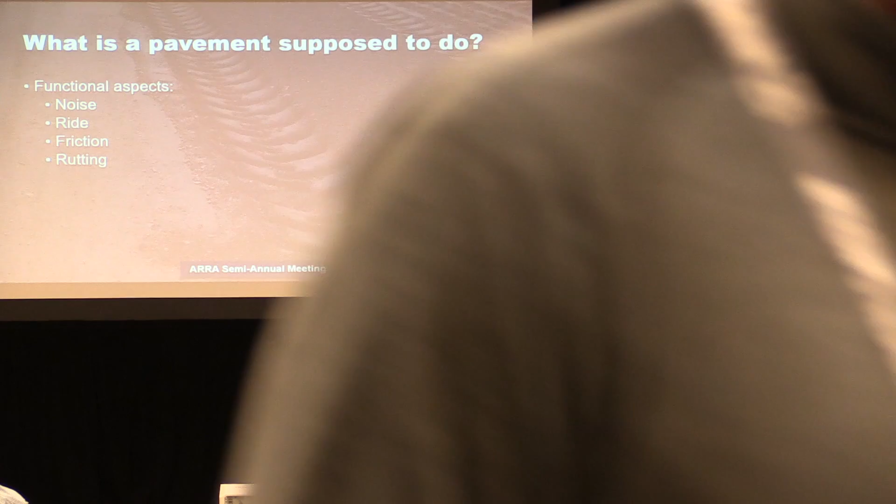It's got to be smooth. It's got to have good friction. It shouldn't be noisy. It shouldn't be rutted. And those are very important things. But in a lot of cases, rutting being kind of a hybrid, you can have a rough pavement that's structurally very sound. It may have terrible functional aspects, but great structural aspects, or vice versa.

You can take a road that's really in poor shape and do microsurfacing on it, and a week later, when the pavement management folks come out and rate it, it's going to look good, but is it really going to hold up? So what I want to talk about is more of the structural aspect of things.

In the early days of pavement design, when the whole field was being invented roughly 100 years ago, the original goal was to get the farmers out of the mud. The concern there was initially to protect the subgrade from permanent deformation. You don't want whatever's underneath the pavement moving around on you. You want to get it to where it stays stable. In the early days, that was really where pavement design mostly went.

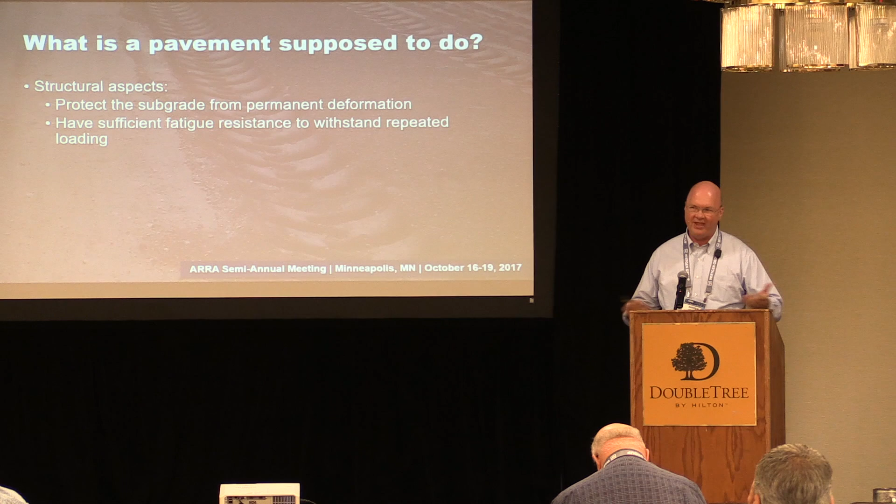But as loads and traffic numbers started to increase, certainly by the 50s, for more busy roads, fatigue resistance comes into the equation. What you have to imagine is like taking a coat hanger and flexing it enough times, eventually it'll break. It's the same thing with pavement, certainly bound pavement layers. You flex them enough times, they'll start to fail, even if they are, in theory, protecting the subgrade.

So how does a pavement do this? There's sort of two ways about going about it, and I'm not saying that one way is better than the other. They both have their pluses and minuses. But on one end of the equation, you're looking at flexible pavements.

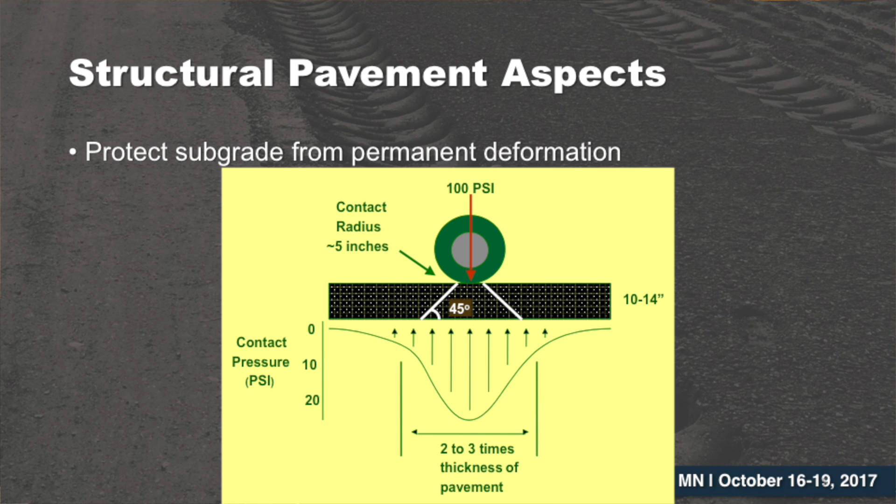And really, asphalt is sort of flexible in the sense that the coarse aggregate skeleton is what supports the load. You put a load on top, and what's underneath it is more rocks, and those rocks hold it up. And then the next set of rocks holds that up, and you keep doing that until eventually you spread the load out enough that whatever's underneath isn't getting damaged. If you have a softer material, you just stack more rocks on there, you get a bigger load, you stack more rocks on there.

And really the fine aggregate and the liquid is as much there to hold that skeleton in place as it is to provide strength. Now that's not entirely true, but just like if you take a physics class and they talk about frictionless surfaces and massless springs and things like that, there's no such thing as pure, but in this case, that's kind of how it works.

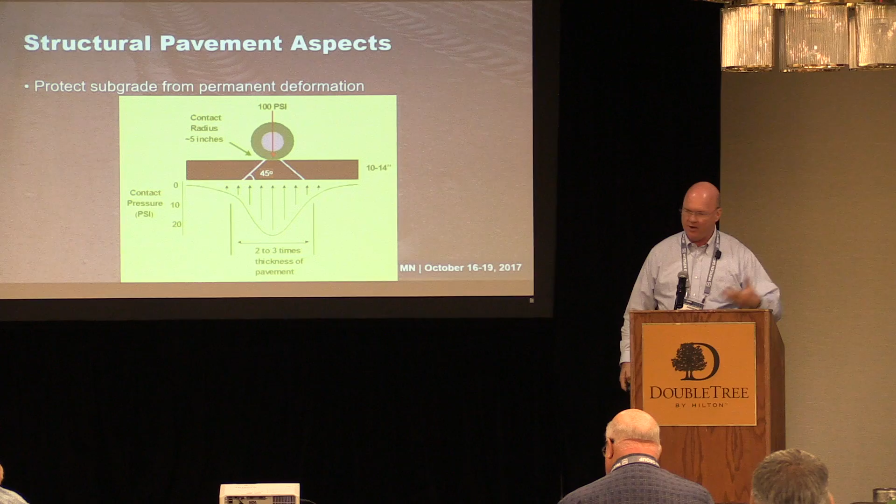So typically, if you have your load on top, what you end up with is 100 psi contact pressure tends to be reduced to about 20, 25 psi, and roughly a 30-inch surface area underneath. So if you have a relatively stiff subgrade, or you can put granular material underneath, that's great.

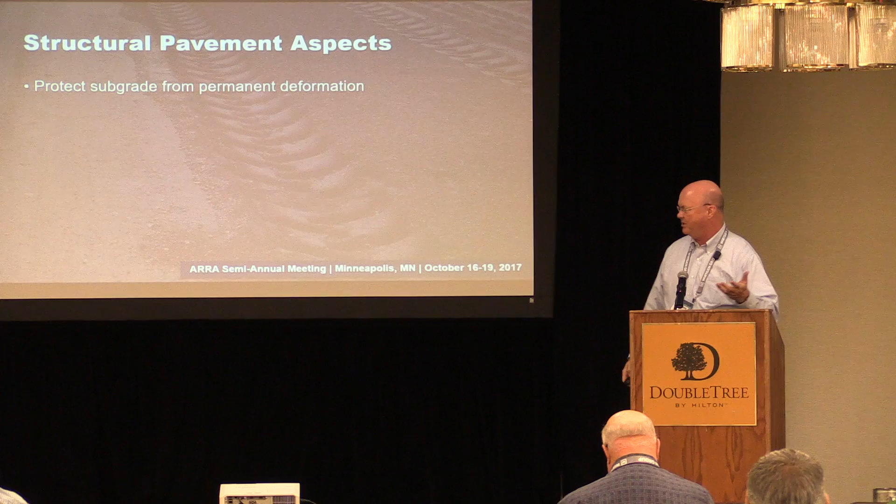When we talk about chemically treated base materials, instead of having that aggregate skeleton holding things up, what you have is a resistance to bending. In a rigid or semi-rigid base, that resistance to bending is what's holding up the load, and you have a lower pressure underneath. But obviously all the forces have to add up, so in the end you end up with a much larger area of influence for your load.

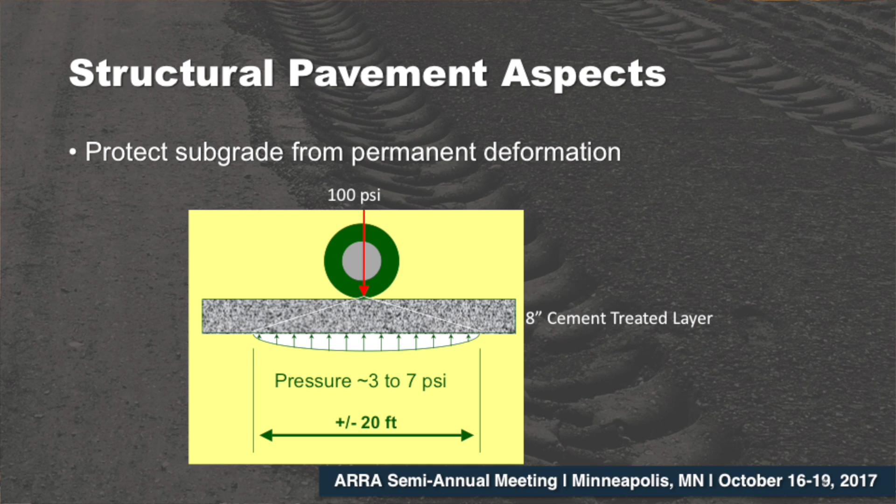This is both a bug and a feature in these sort of pavements. It's a feature because you're putting less pressure on what's underneath. It's a bug because if you have a problem in that pavement, 10 feet away things may start going wrong. If you imagine this wheel rolling along and getting to the end, all that load is kind of going to pool up right there.

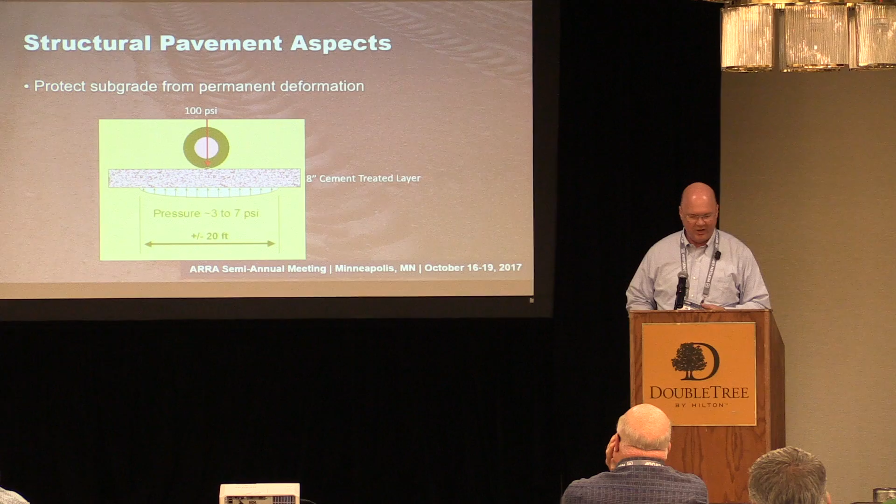So load transfer efficiency at discontinuities in this sort of base becomes very important. However, for most pavements in general, when you have a load on top of your pavement, it's typically in compression right under the load, and in tension at the bottom of the layer. Then out at a distance on top, it's in tension, and at a distance, it's in compression at a much lower magnitude.

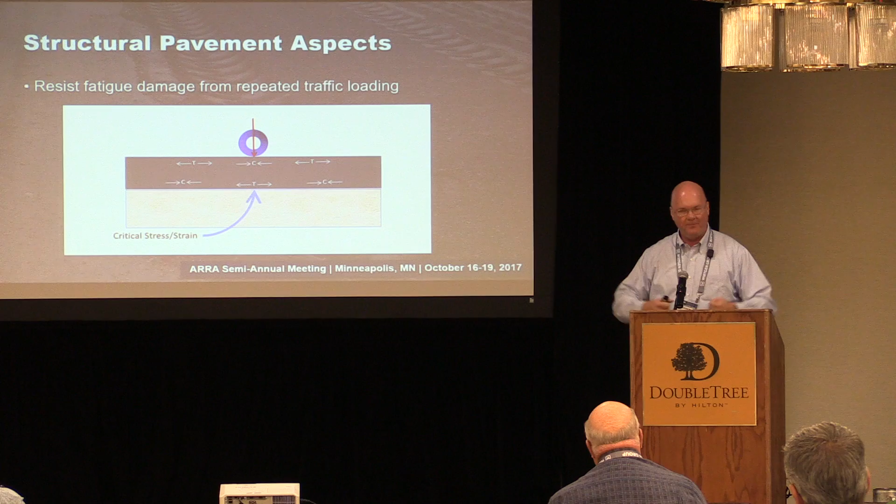If you imagine this wheel rolling down the road, whether it's a flexible asphalt or a stiff cement-treated layer, that layer is constantly undergoing a kneading effect because suddenly it goes into compression, then it's into tension, then back into compression again. It's kind of a back and forth motion, and that's where you have to worry about how things work.

So these days, for higher type roads, for most pavements with bound materials, fatigue damage is the controlling factor. I'm sure you can find exceptions, but in my experience fatigue damage is the controlling factor. This may seem obvious, but the larger the stress or strain at your critical point, the fewer load repetitions you get to failure. So ideally you either want fewer stresses and strains on the pavement, or you want to reduce them through your pavement design.

So the relationship between material response and damage is what they call a transfer function.

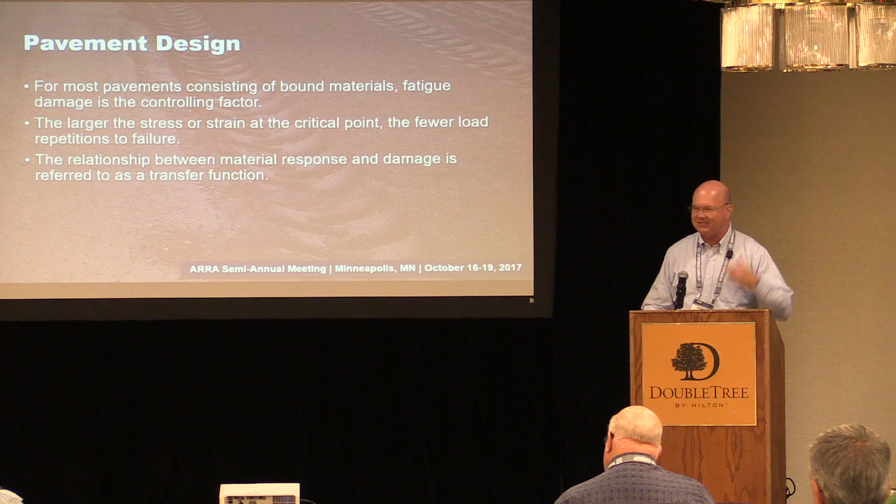These are complicated things, but still, from an intuitive thought experiment perspective, you can still kind of work on this.

You have two endpoints in any pavement design. At one extreme, you can have a pavement that'll fail the first time you use it. You see this more in airfield type pavement where you've got really heavy landing gear loads that can punch through a pavement from the get-go. I personally have never designed a pavement that failed in one load repetition - my own personal record is 8 hours. That was not a good day, especially because it happened on Interstate 85 over Memorial Day weekend, so it was a temporary pavement. It was supposed to last 3 days, not 8 hours, but anyway.

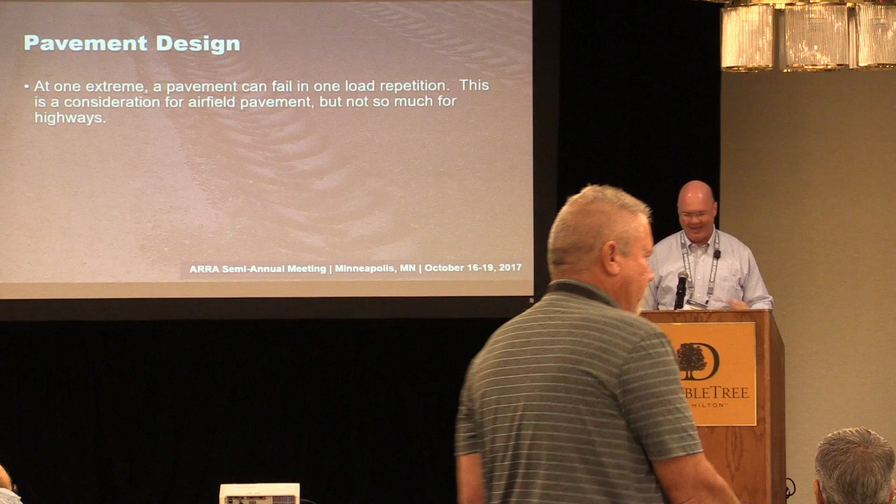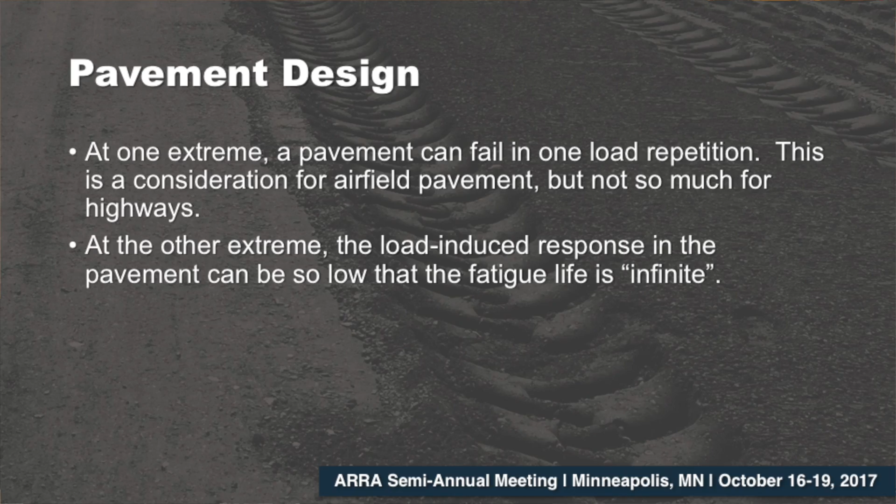This typically is not a problem for most highway type pavements, but at the other end of the spectrum - and Dr. Powell from NCAT talked about this a little the other day - you can have the load-induced response in that pavement be so low that you more or less consider it to have an infinite fatigue life.

Now, does that mean the pavement lasts forever? No, there's still environmental factors, still natural variation in the field from construction, the traffic may not be what you think, whatever. But from a pure perspective, if you stress your pavement so little, it should not fail from a fatigue relationship. And ideally, if you can get to this point at a reasonable cost, that would be nice to have.

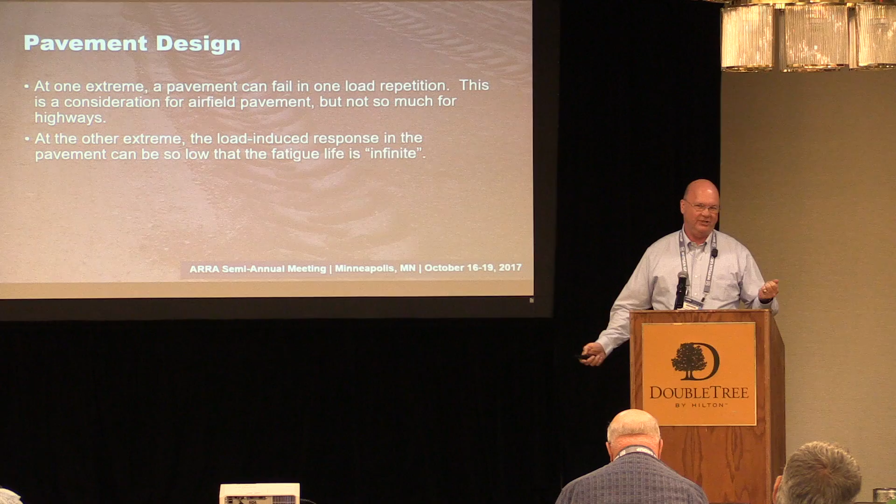I had a civil engineering professor many years ago who once said that a civil engineer is a person who can do for a nickel what any damn idiot could do for a dollar. So you can always design a pavement to be 28 inches thick and have 5 layers, and it might work, but you really don't need that for a residential neighborhood. So the key is to try to get there cheaply.

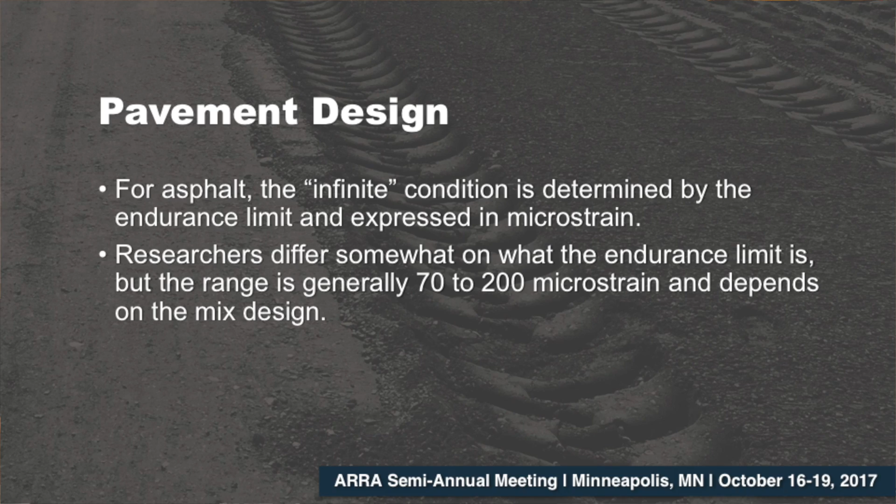So in asphalt, and again, Buzz spoke about this yesterday, the infinite condition is determined by what's called the endurance limit, expressed in microstrains - sort of how much you're stretching the asphalt. There's typically some variance; you can always find researchers with different numbers, but typically 70 to 200 microstrain is considered a perpetual condition, depending on the mix design and other conditions.

For cement-treated bases, or really chemically stabilized bases, the fatigue life is expressed as the ratio of the horizontal tensile stress to the modulus of rupture. Modulus of rupture is pretty much where you're looking at the tensile characteristics of a cement-treated material.

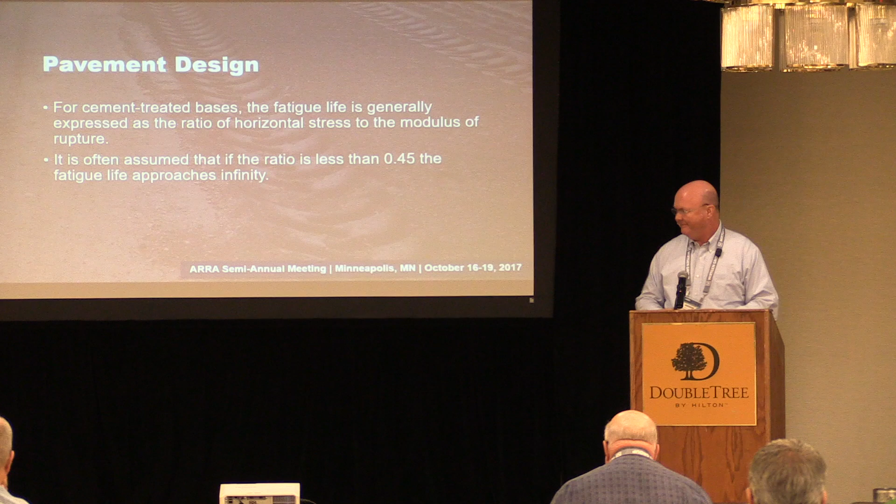Concrete, use the thought experiment here - obviously concrete likes compression much more than it likes tension. So tension, even in a cement-treated base, is an issue. You want to keep that tension in that material at a relatively low proportion of what it takes to bust it. A lot of models assume that if you keep it below 45% of the modulus of rupture, you shouldn't have failure in fatigue, and different models pick a different number, but it's somewhere in there.

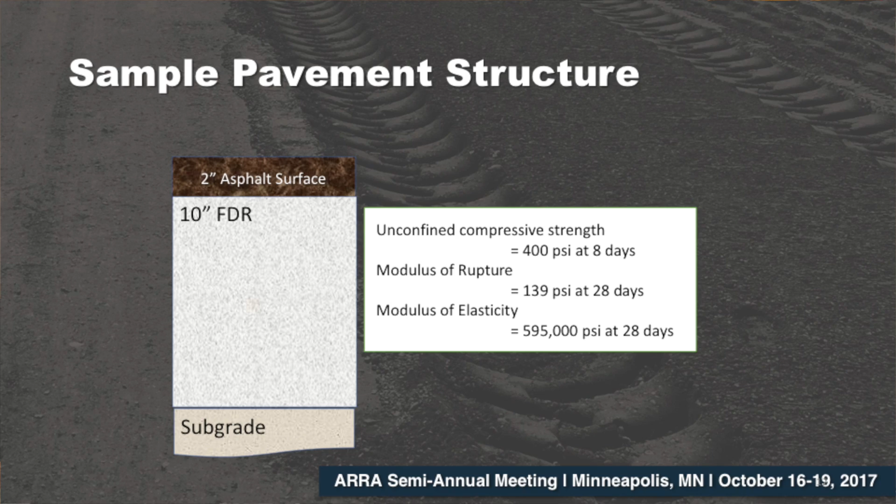So here's a typical pavement. South Carolina predominantly uses cement-treated FDR. We have a long history in South Carolina of cement-treated bases. South Carolina did the first scientifically designed cement-treated base in 1935. It's still in service - they did 3 or 4 projects, and most of them that we can still find are out there. So that's what we do a lot of, this is sort of what this example is, but you can do it with other materials.

So here we're assuming our unconfined compressive strength is 400 psi, and that works out to be a modulus of rupture of 139 psi - that's another one of those get-a-million-dollars type things. There are a number of different correlations between modulus of rupture and compressive strength, so you may have a different one. I'm not up here to necessarily push one of those models, this is just an example.

So what is it David Letterman used to say? This is a demonstration, not a competition. Please, no wagering. So please don't build a pavement based on this necessarily. And the modulus of elasticity would be about 600,000.

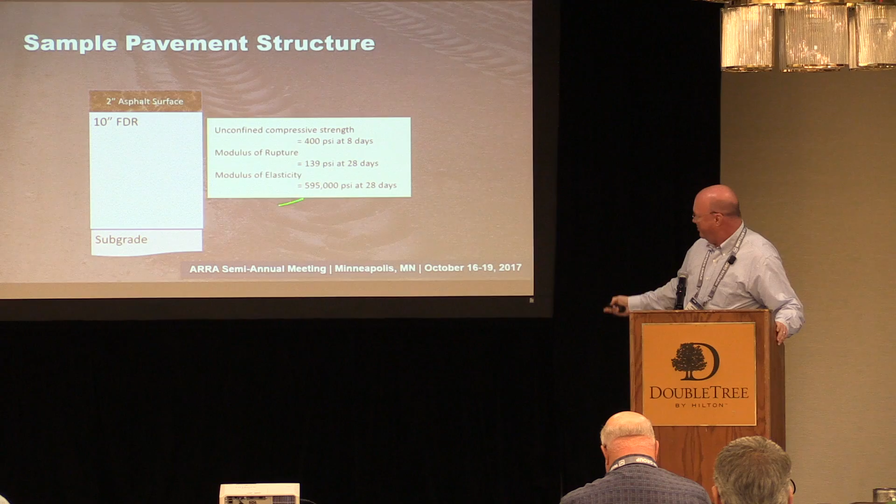So if you go through the math magic on this thing, what you end up with is a horizontal stress of 51 psi in tension at the bottom of that layer. So at that critical point, you're looking at 51 psi, which works out to a horizontal stress to modulus of rupture ratio of 0.38. So we're under that 0.45 level. Of course, this is a synthetic pavement.

I can control all the numbers that go into it, so you can imagine I picked one that would come out this way. Obviously, if your subgrade is weaker, if your chemically treated layer is weaker, if your asphalt layer is thicker or thinner, all these numbers change. But again, please no wagering.

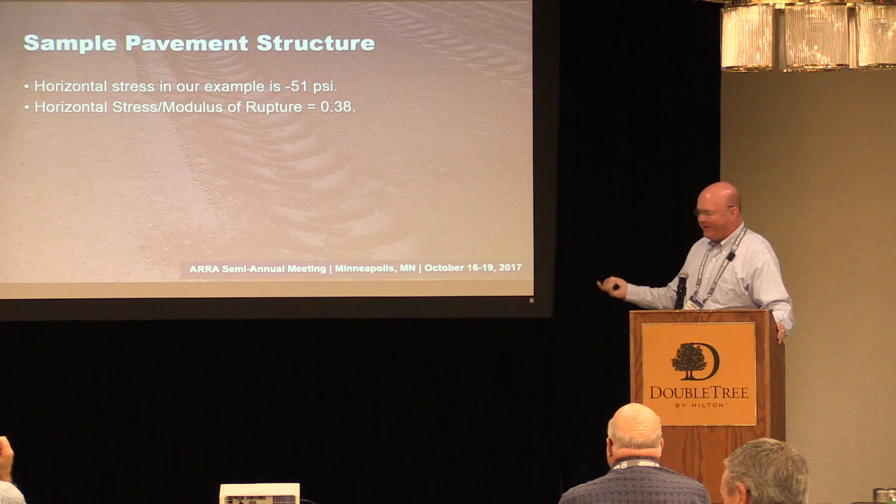So we got a 0.38 out of this particular design, and there are a whole bunch of different transfer functions out there. This is the original AASHTO MEPDG transfer function, which is uncalibrated. My understanding is they introduced a new calibration for this last week in Denver - unfortunately I wasn't there to see it, so I don't know what the new magic numbers are. It's not the absolute numbers here that matter as much as the change caused by additional increments of thickness. But in theory, you should get 14.5 million 9 kip wheel loads on this pavement to failure.

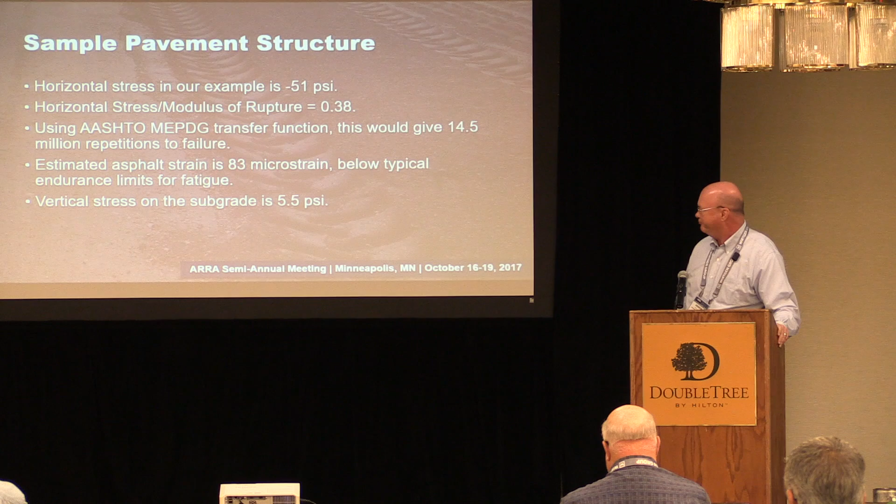And if you look at the microstrain in the asphalt, in this particular instance, it comes out to be 83, which is below the typical endurance limits for fatigue. And as we mentioned at the beginning, the vertical stress on the subgrade is 5.5 psi, so it's protecting the subgrade reasonably well in theory.

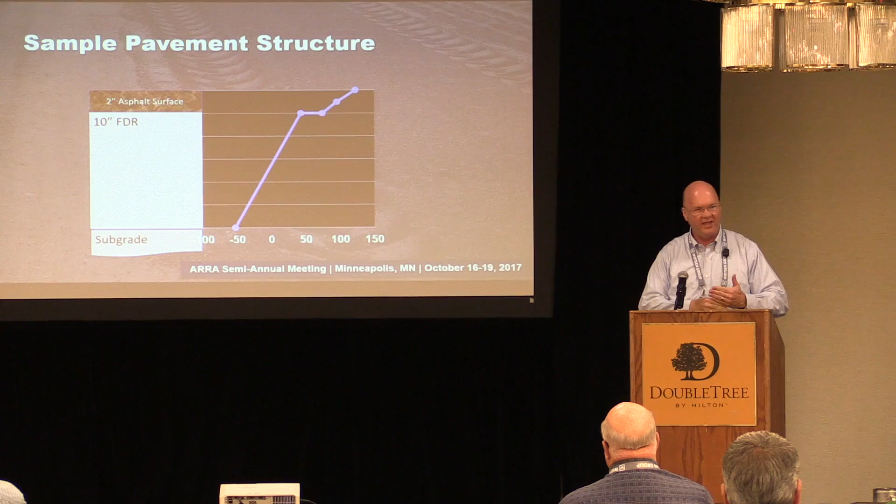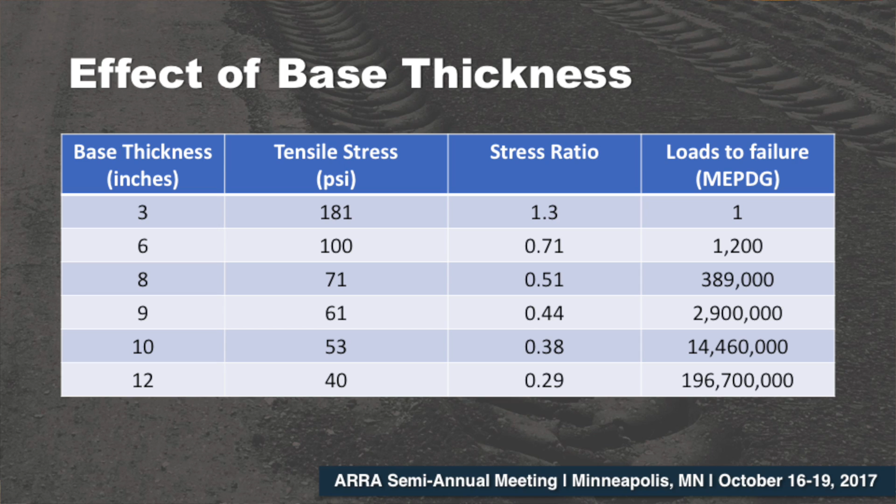So now here's the effect of changing the thickness of that layer. As you can see, if you went with 3 inches - and cement-treated bases are by their nature brittle, they may have a high stiffness, but then glass has a high stiffness too, but obviously you make it thin enough, it's very easy to break it. Same thing with a cement-treated or chemically stabilized base. In this case, our tensile stress would be 181 psi - that's a ratio of 1.3, so this is your famous break-it-on-the-first-try type pavement. 3 inches probably wouldn't work.

But you bump it from 3 to 6 inches, your tensile stress drops to 100, which is below our 139 number.

And so you get a 0.71 ratio, and that works out to be about 1,200. So it's not going to break the first day, and maybe if you only get 10 loads per day, that's still only about 120 days. So it depends on how fast the check clears as to whether this one will be good.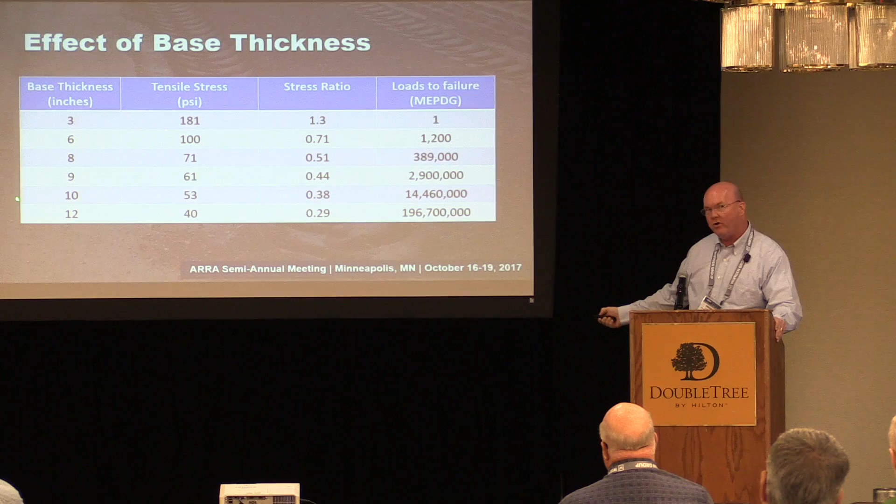But anyway, you do increase it by a factor of 1,200 when you change it. Now you add another 2 inches, go to 8 inches, and you're looking at 400,000. So you've increased it by a factor of about 300 to 350 in this case by going to 8 inches. Add 1 more inch, go to 9 inches, the stress drops to 61 psi, you're at a 0.44.

Which again in some models would go to infinite. However, in the particular one I picked for this, and I picked one of the more pessimistic ones, you're looking at 3 million. So again, now you've gone from 400,000 to 3 million. So you've got an increase of roughly 6 or 7, going from 8 to 9. So again, just 1 inch will typically get you a lot more life.

And again, the previous Dr. Andrew pointed out that above 10, the life increases greatly, and we can see that here. You jump from 9 to 10, and now you've gone from 3 million to 15 million, so again a factor of 5 increase on this one. And then 12 inches, you're at 197 million, and a 0.29 stress ratio. So you shouldn't break that layer by running traffic loads on it.

Now, there are a lot of other ways to break a layer, of course, and this is really a super simplified mechanistic design because there are superimposed stresses caused by temperature, caused by the curing process of the base, all this sort of thing. So as I say, it's demonstration, not a competition.

Please, no wagering. But this again hopefully gives you a feel about why it's important to go thicker. I used to joke when I was the pavement design engineer in South Carolina that if more was better, then too much was just right when it came to pavement design, because you've never seen a newspaper headline that says pavement lasts much longer than expected, no delays today.

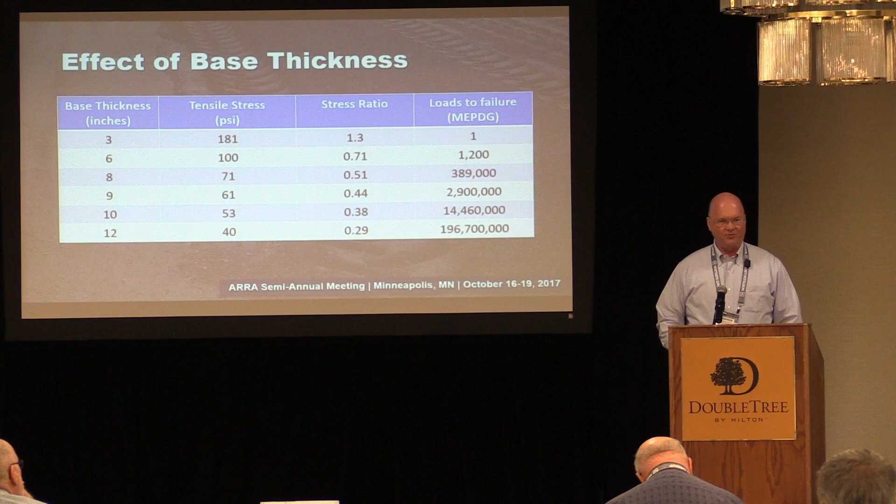And they're doing it 6 inches thick to start with. And the soil cement is not as strong necessarily as what we're talking about here. So their stress ratio is not good, and they're having failures. However, I will say I have designed 6-inch FDR jobs that lasted a lot longer than 1,200. So I think these numbers are pessimistic.

And they said, well, if it doesn't work, we go in and do it, but we put more cement in the next time, which, working for the cement industry, I would think, hey, that would be good. But the problem is they just keep throwing more cement in there when they really do better to go deeper. And so that's kind of what we're preaching here.

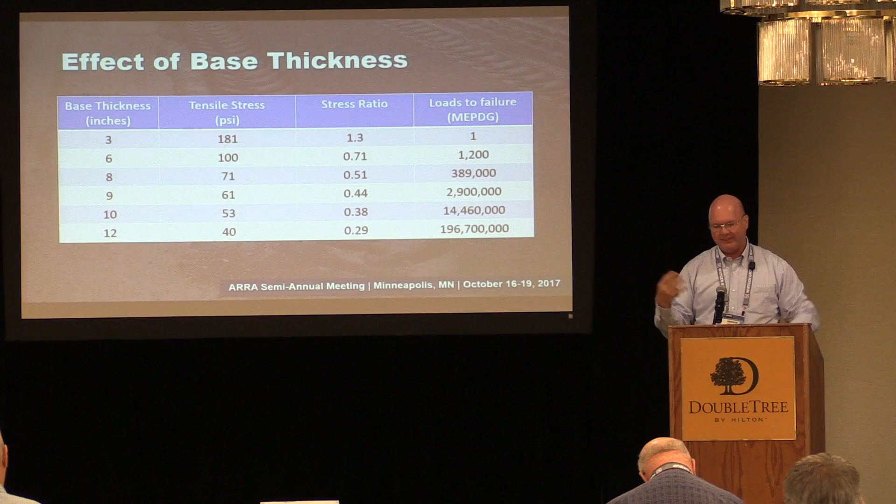And again, even when you're talking a granular type base, it's a similar thing. So there are a lot of pavement design procedures out there. It was mentioned the MEPDG. It looks at the effects of pavement materials, but it has to be calibrated, and that's been the problem.

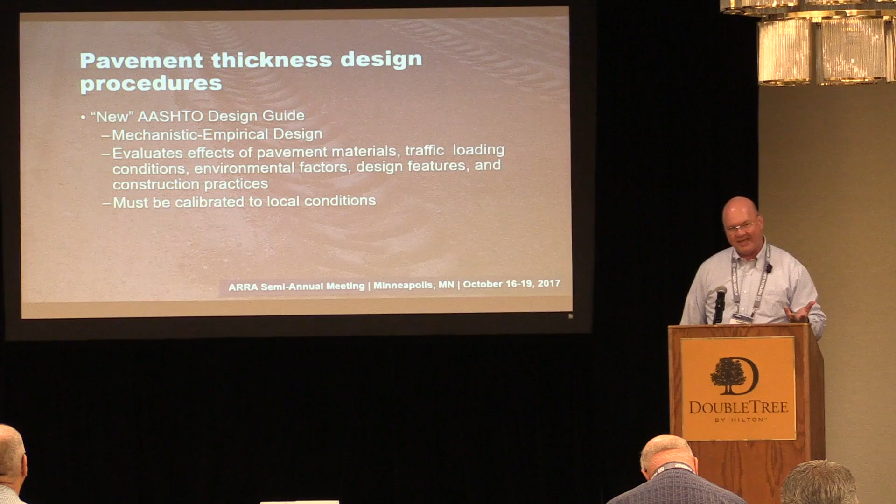So this is a really brief pavement design course. I could go on for a lot longer, but I think I'll wind it up here for time. So are there any questions or anything you want to throw at me?

How much does in-place density affect those values? A lot. We don't have specific research on cement-treated bases with variable compaction, but there was work done on other cement-treated bases, mostly for dam construction. What they found was that if you only compact the material to about 80% of the density it's supposed to have, you only get about 20% of the strength. So appropriate compaction with a cement-treated base or chemically stabilized base is a key acceptance factor. You've got to compact it if you want it to give you the strength you're assuming you've got in the first place. So it is critical.

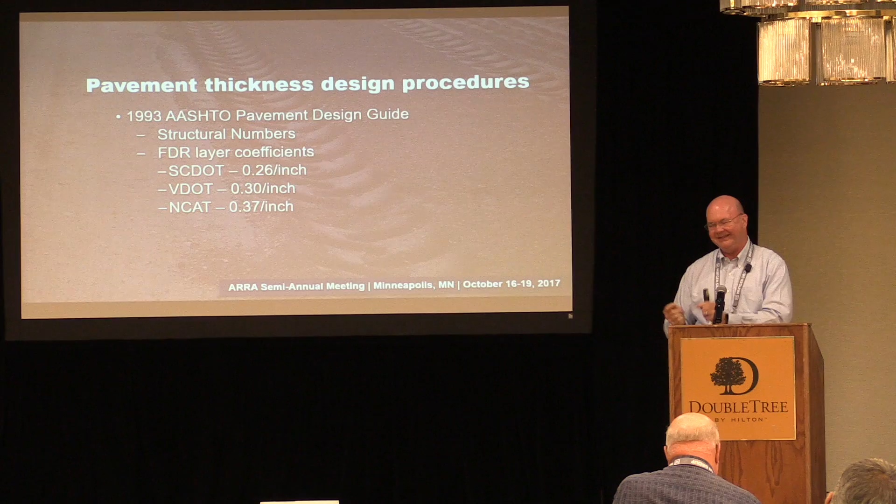We were talking about the micro strains, the 70 to 200. Yes. You said mix type is a factor of that? Well, yes. That was part of what Buzz Powell talked about the other day, that the cold recycled material was behaving in some cases more like a granular material than like an asphalt. So it does depend on the behavior of your mix. But keep in mind, I'm not an asphalt guy, so I just copy the bullet points from other people in that case. But my understanding is the mix design does make a difference.